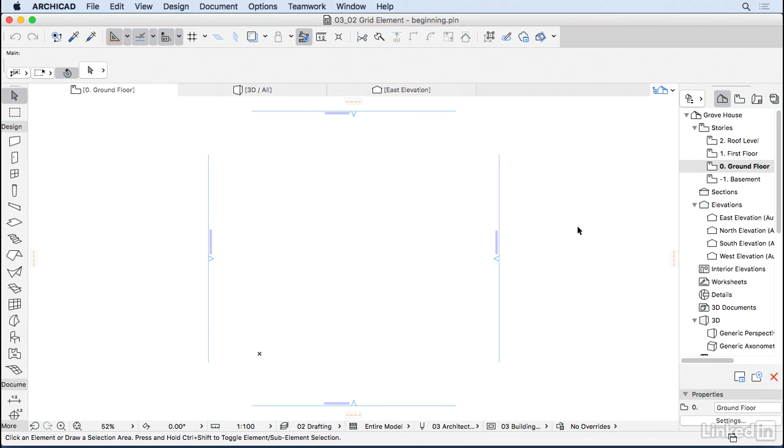But before doing that, let's get rid of all those elevations that come with the ArchiCAD 20 template. Holding Shift, I'm gonna select all of them and press the delete key. ArchiCAD is gonna ask if you're sure—yes, delete anyway. We're gonna add those elevations later; we don't need them now. And now we have a clean canvas to start our project.

To access the grid tool, we go here on the toolbox and click on More. The grid tool is the first icon here, so I'm going to click on it. To add the grid, we click on the first and the second point of the grid. And here we go, we have the grid A there.

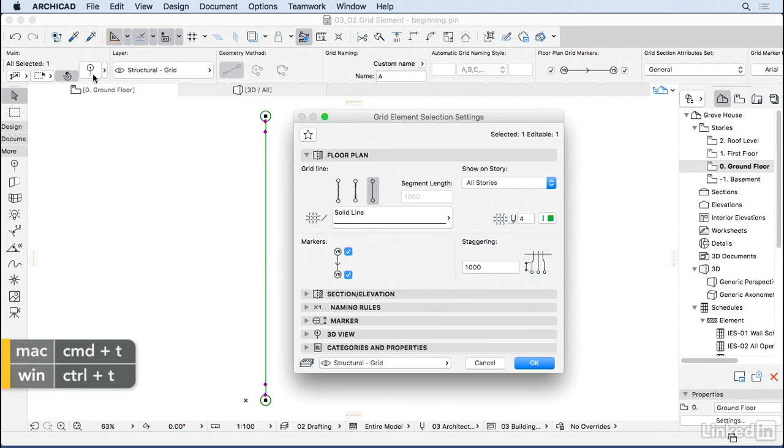So now let's select this grid and change the settings of it. I'm going to click on it and then go here on this dialog settings icon, or use the shortcut Ctrl+T, or Command+T on the Mac. And here we have all the settings for the grid element.

Starting with the floor plan, where we can choose how we want the grid line to look, which is this green line in the middle. We can have the grid line as an entire line between those two markers, or we can have it segmented by 1 meter, so we have a 1 meter segment here at the end next to each marker. Or we can have only the marker heads, so no segment at all. I'm gonna stick to this second option here.

You can also choose the line type of the grid. So I'm going to change here from solid line to dot and dashed.

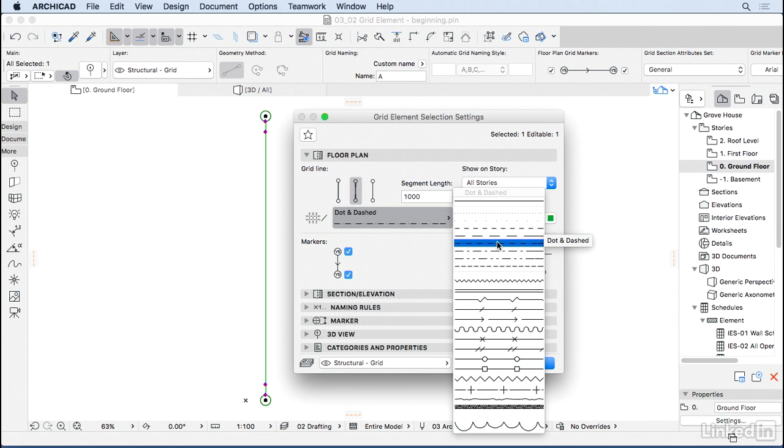You can also choose where you want to show this grid. Right now we have it on all stories, or you can choose only some specific stories. You can also choose to show only one or both markers. I know some practices prefer to have the grid marker only on one side, so you can switch it off here. I'm going to leave both on for now.

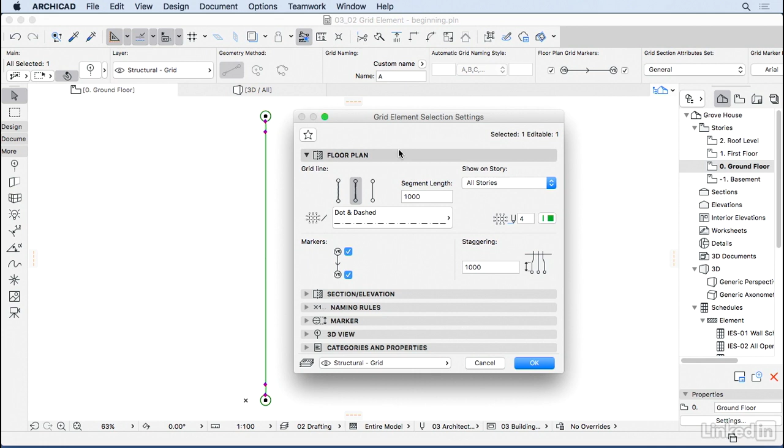You can also choose how you want this grid to look on section/elevation, same as floor plan. And you can choose the naming rule. Right now we have a naming that starts with A—let's keep it like this for now, we don't need to change it.

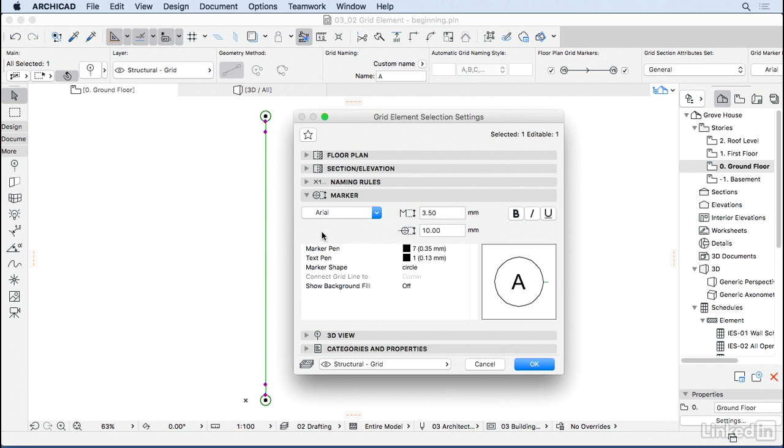Let's go to the next one, the marker, where we can change the size of it. But for now this is a pretty good size, so let's press OK, and you'll notice our grid has changed a little bit.

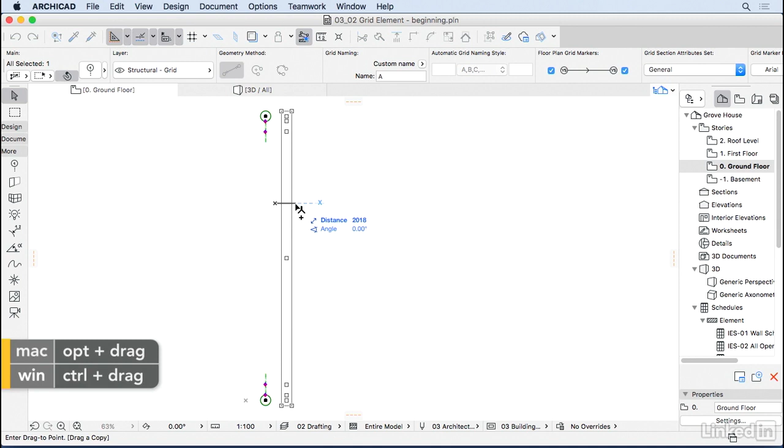The way I add the grids is by adding the first one, then I select it and use Command-D for drag, or Ctrl-D on Windows, and start moving this first one. In the middle of the process, I press the Option key on the Mac or the Ctrl key on Windows, and type the distance I want. In this case, I know it's going to be 4 meters 35, press Enter, and I have my next grid.

I just want one of them, so I click on it, Ctrl-D to start the dragging process, press the Option key on the Mac or Ctrl on Windows, and type the distance for the next grid.

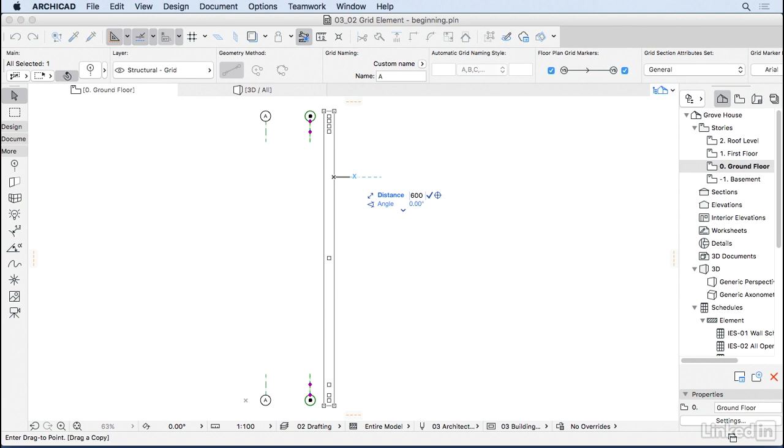When you have grids that are stacking on each other like this, all you have to do is select the grid, click on one of those magenta points here, make sure you choose from the pet palette the last option, which is the Move node, and move the node a little bit to the side here.

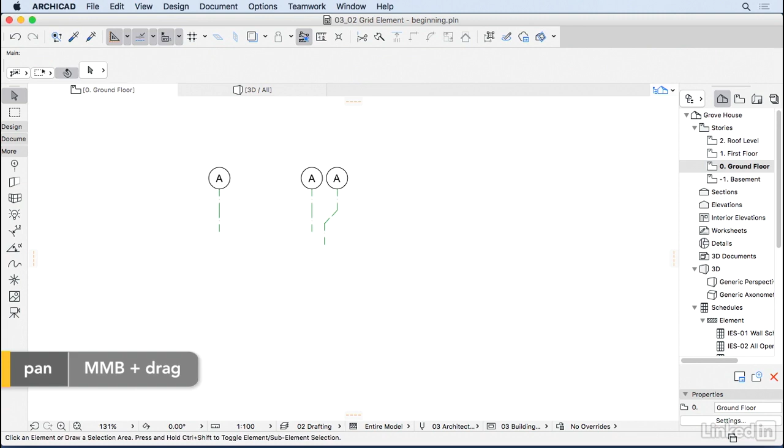After I have added all the grids that I think I'm going to need, I go back and start naming them—so this is A, next one is B, next one is C. I don't need to use Ctrl-T or Command-T to go to the settings; I can use the shortcut here on the top and just change it quickly, and so on.

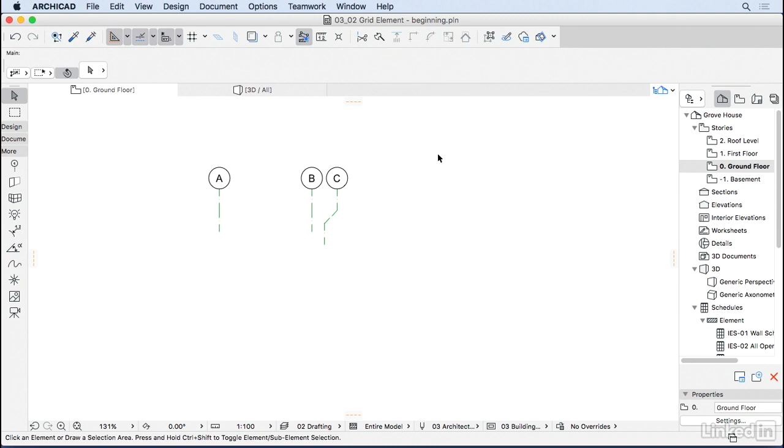And that's pretty much what you need to know about grids right now. So go ahead and add all the vertical and horizontal grids, rename them, and we can start adding some walls.